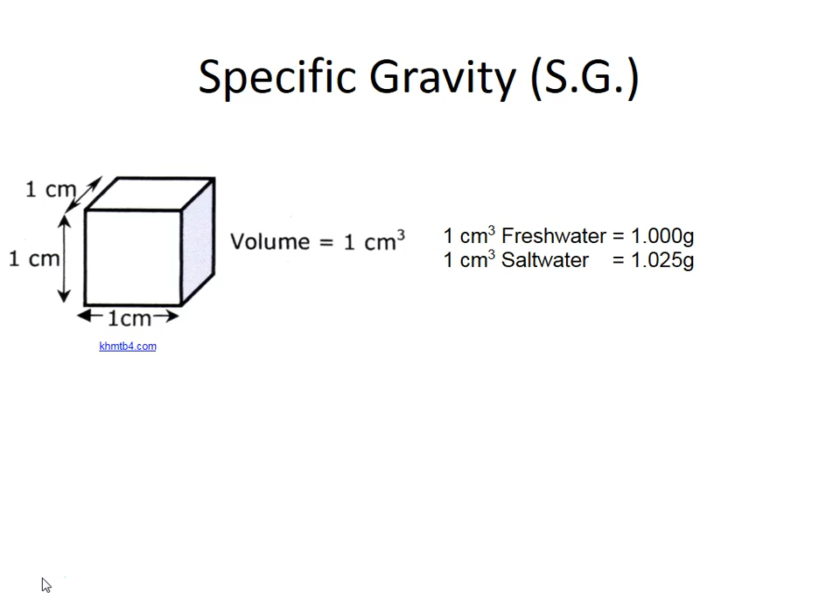The story in this case really starts with specific gravity. Specific gravity is based on a cubic centimeter. 1 cubic centimeter of freshwater weighs 1 gram. 1 cubic centimeter of salt water weighs 1.025 grams. You can see that the salt water is a little heavier, and that's due to the salt dissolved in the water. Well, specific gravity is defined as the weight of a cubic centimeter of a substance divided by the weight of a cubic centimeter of fresh water.

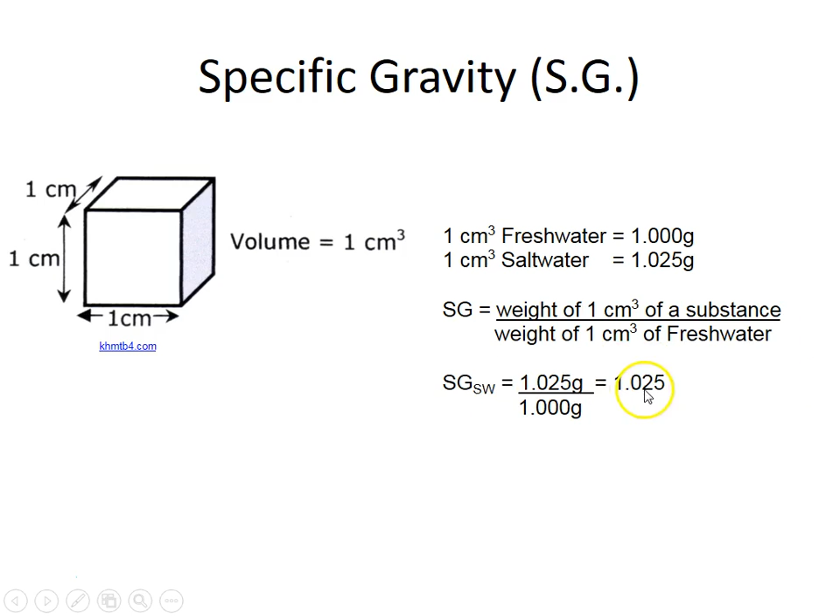So in this case, the specific gravity of salt water is 1.025 grams divided by 1 gram. You can see that the grams cancel out, and so you get this absolute value 1.025. Now, this is a useful number because we can compare the specific gravity of salt water to, let's say, the specific gravity of something else, and then we can get an idea of the relative densities of these various items compared to water.

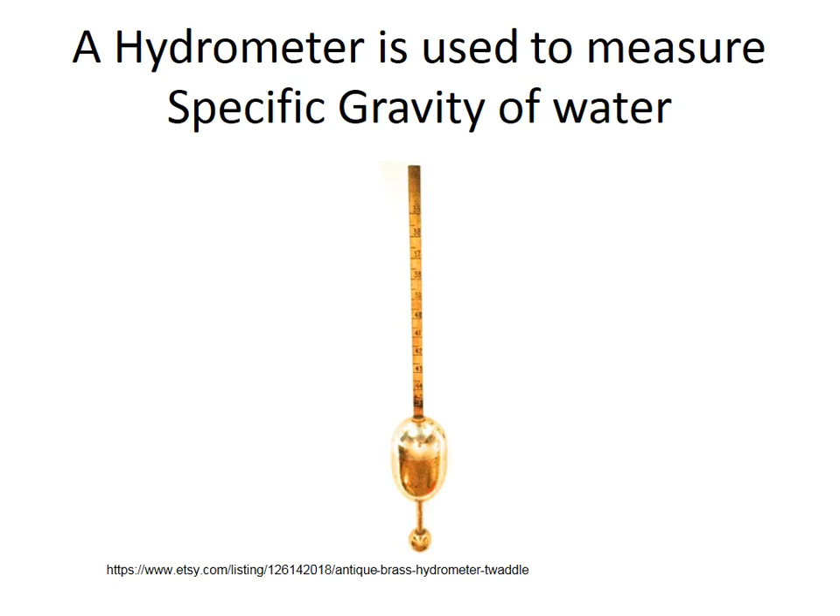How do we measure specific gravity on the ship? Well, when you're loading your vessel, you're going to basically get a sample of that water that's around the ship, and you'll put this brass hydrometer in there, and it's calibrated for specific gravity, and then you can get the density of the water where you're actually loading.

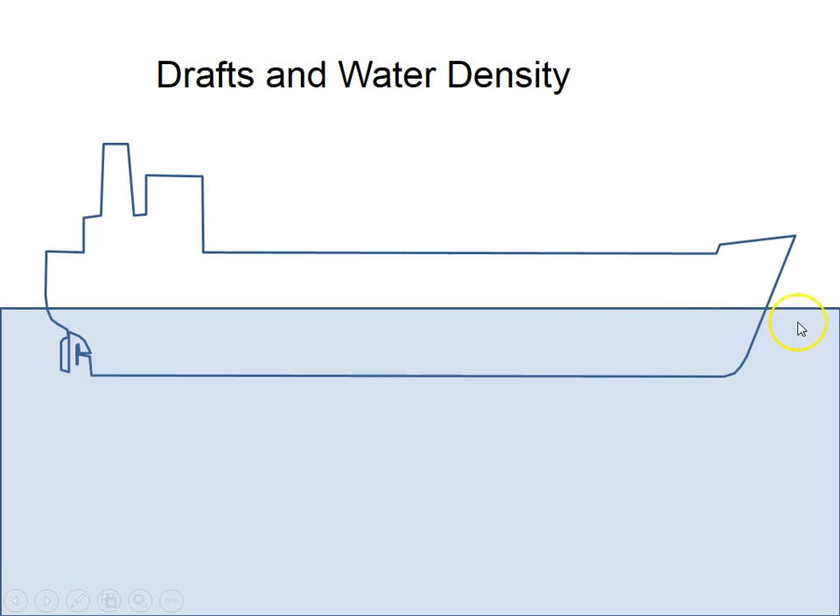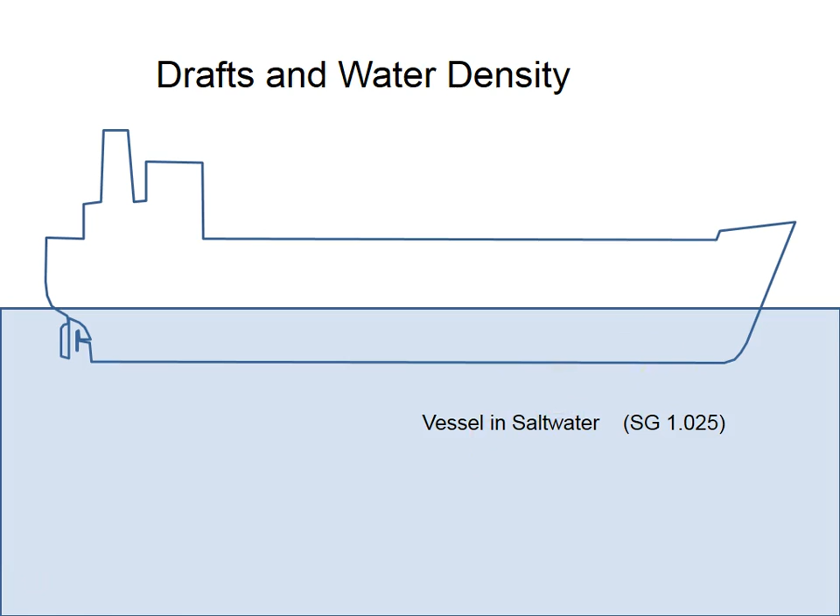Now this is important because different densities of water are going to create different water lines on the vessel. For instance, let's say that you are in freshwater, and you loaded the vessel to this level here. Well, that's a specific gravity of 1. If you immediately just transported the vessel into salt water, specific gravity 1.025, the vessel would rise on its own. The reason being that that salt water is heavier and it would push the boat up. So without adjusting the weight of the ship at all, just changing the water that it's in, the vessel would rise. This is called the freshwater allowance.

It turns out that all ships are designed to be loaded to what's called the design water line, in this case, the salt water line. Really, you're not supposed to surpass that in most conditions because you need what's called freeboard for reserve buoyancy. You get out there in bad weather, the ship's going to be rolling, and you need that freeboard, that reserve buoyancy, in order for the ship to be able to right itself.

The other thing is, let's say you take damage to the ship, you take a hole and a compartment floods, well, that's going to sink the ship as well. So you need that reserve buoyancy, that freeboard, in order to keep the ship safe. But if you were in freshwater and you load your vessel to this design water line, by the time you get out into the open ocean, the ship's going to rise, so you wouldn't be carrying enough cargo.

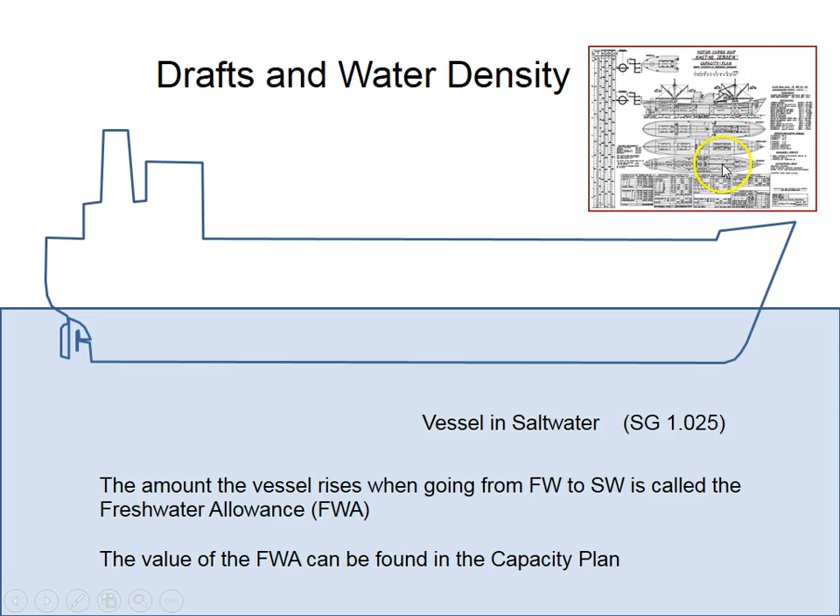So we have this freshwater allowance, which we're going to look at in greater detail in the next couple of slides. By the way, the freshwater allowance can be found in the capacity plan, which most vessels will have. It's a nice schematic of the ship, various levels, the tanks, capacities, your deadweight scale, and lots of stability information. So, freshwater and dock water allowances.

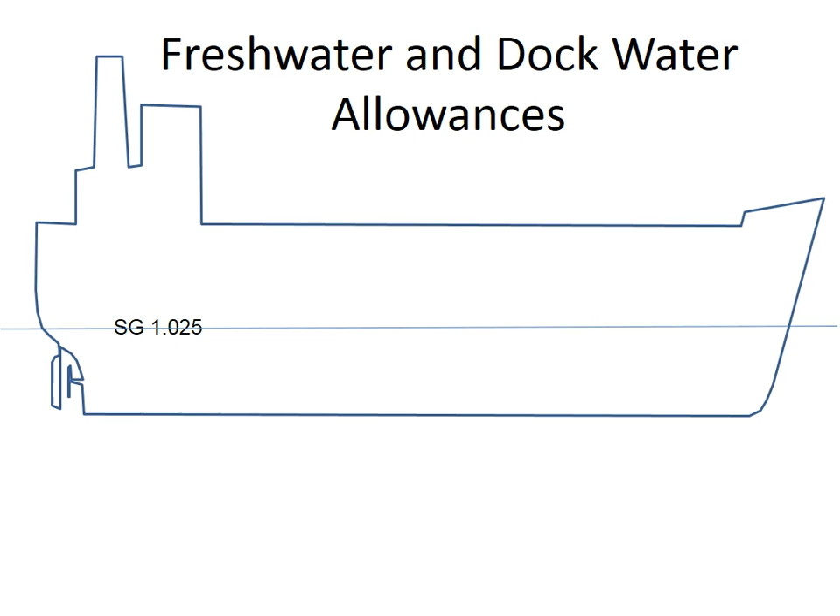So if you loaded a vessel in salt water to a certain loading condition, its water line might be here. Now, if you put that vessel into freshwater, the ship would sink deeper, and you'd have a new water line up here without changing the weight of the vessel at all. Just by going from fresh to salt or salt to fresh, you'd have a different water line.

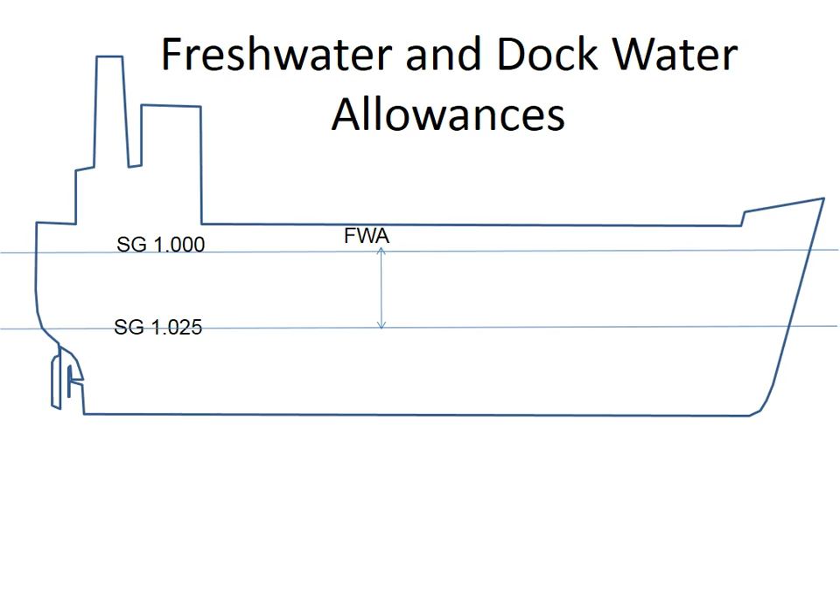And the difference between the water line at a specific gravity of 1, fresh water, and specific gravity 1.025, salt water, is the freshwater allowance. And you can express that in inches or centimeters. Well, it turns out that each vessel has its own freshwater allowance because it's based on the shape of the vessel.

Now, what's the likelihood that you're going to be someplace where the specific gravity is exactly 1? Not very likely. Okay? You're likely to be in some specific gravity greater than 1, perhaps less than 1.025 if you're loading in some port. You'd be in what's called brackish water.

Okay, so let's say that the salinity was halfway between 1 fresh water and 1.025 average ocean water. Well, where would the water line be? Well, you may have already figured it out. That specific gravity is halfway between 1 and 1.025. So if we were in 1.012, this is where the water line would be. And if we then went to sea and got out into 1.025, the vessel would rise from this level to this level.

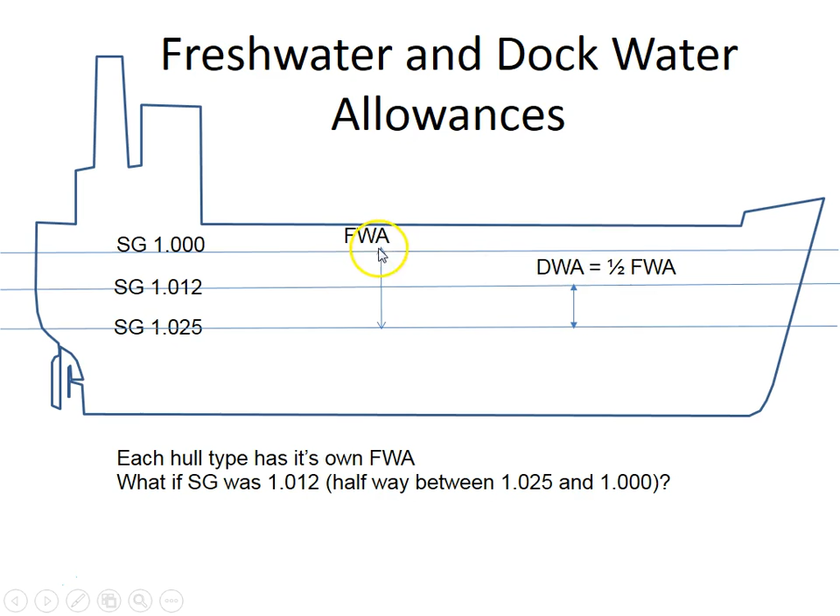So that's what we refer to as a dock water allowance. Okay, it's the allowance made for the actual salinity of the water at the dock. And in this case, because the specific gravity is halfway between fresh and salt, our dock water allowance would be half of whatever that freshwater allowance was. So you'd be allowed to load half of that freshwater allowance.

Okay, now here's another way of looking at it. This is the same vessel loaded the same exact way in each condition. However, the only thing that's changed, the variable that's changing, is the specific gravity. Okay, over here, this would be a specific gravity of 1. This would be a specific gravity of 1.006, 1.012. The water is getting saltier as we go to the average salinity of seawater itself.

Well, now what we're going to do is we're just going to project all these various water lines over to this one, and we're going to compare some stuff. So the question really is going to become, if there's a freshwater allowance for this vessel, how much would we be able to use here, here, and here? So I'm just going to project that water line from freshwater all the way over here.

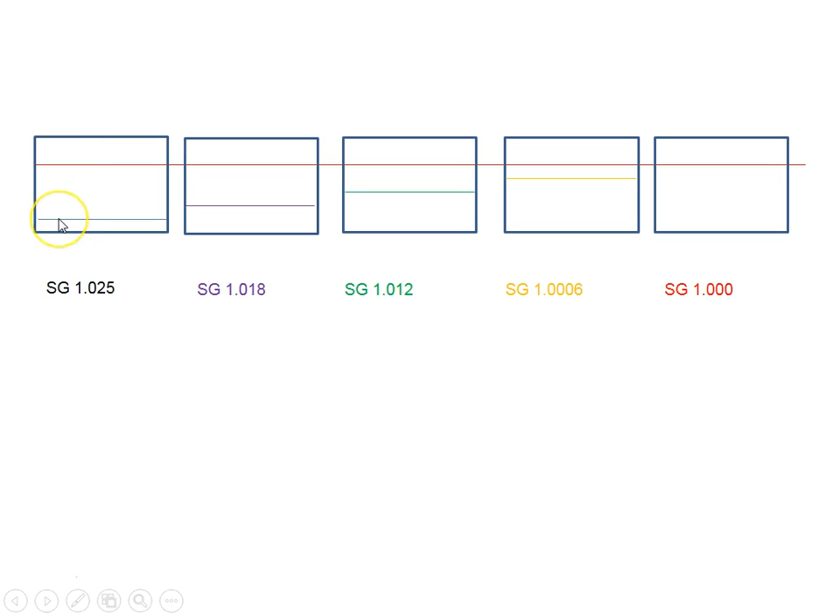This is our freshwater allowance, the difference between 1 and 1.025. All right, and it has some value, centimeters, inches. It's dependent upon each vessel; each vessel that has a different hull type has a different freshwater allowance.

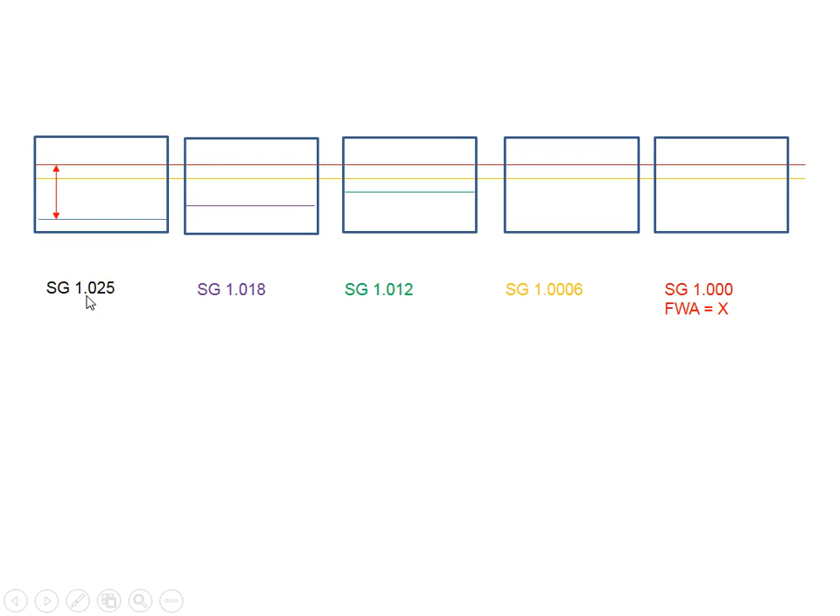Well, now if we project this one over, you can see that that salinity, 1.006, is just a little bit saltier. It's a quarter of the way from 1 to 1.025. Okay, well, you can see that as a result of that, we can use 3/4 of the freshwater allowance. The dock water allowance is 3/4 of the freshwater allowance.

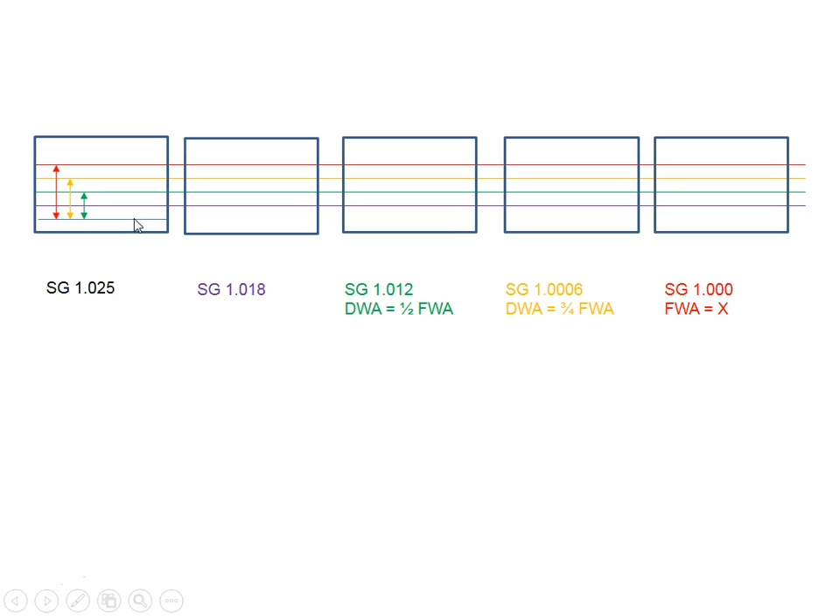Well, how about here? This one here is halfway between 1 and 1.025. Okay, well, we would be able to use half of it. And here, this salinity, this density, is 3/4 of the way from 1 to 1.025, which means we'd only have a quarter of our freshwater allowance left. That would be our dock water allowance. And of course, if we were in 1.025, there'd be no allowance because we're at 1.025.

Now there's a formula for this. And the formula has all these terms. It's basically figuring out the ratio. So the dock water allowance is equal to the freshwater allowance times specific gravity of salt water minus specific gravity of dock water divided by the specific gravity of salt water minus specific gravity of fresh water. My goodness. Turns out that we already know some of these values.

We're going to be able to look up the freshwater allowance from our capacity plan. The specific gravity of salt water we already know is 1.025 on average. The specific gravity of the dock water we're going to measure with our hydrometer. The specific gravity of salt water again is 1.025 and fresh water is 1.000. So we can actually substitute some terms in there, and this is the formula that you should probably actually memorize. So 1.025 minus whatever that value is from the hydrometer, and then 1.025 minus 1 gives 0.025.

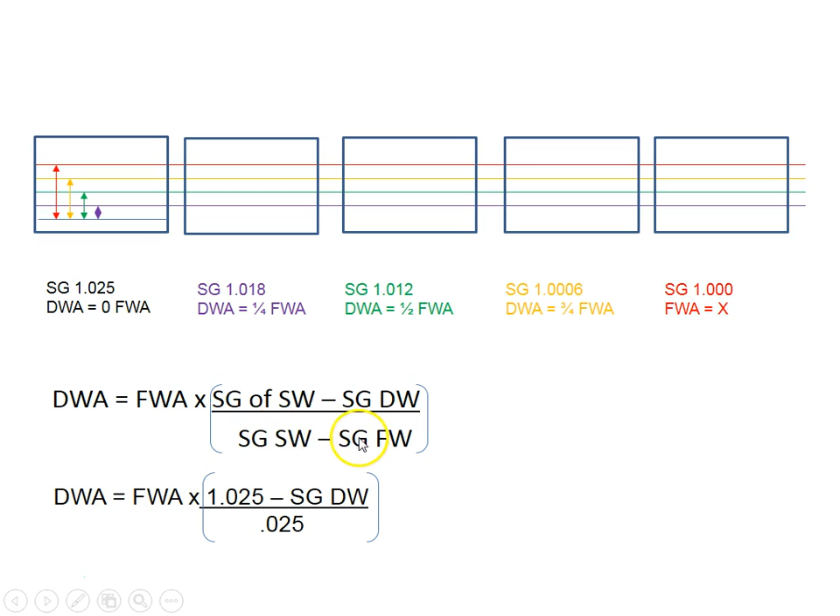And so that's an introduction to freshwater allowance and dock water allowance. The next thing we're going to do is look at load lines and load zones and then put it all together.